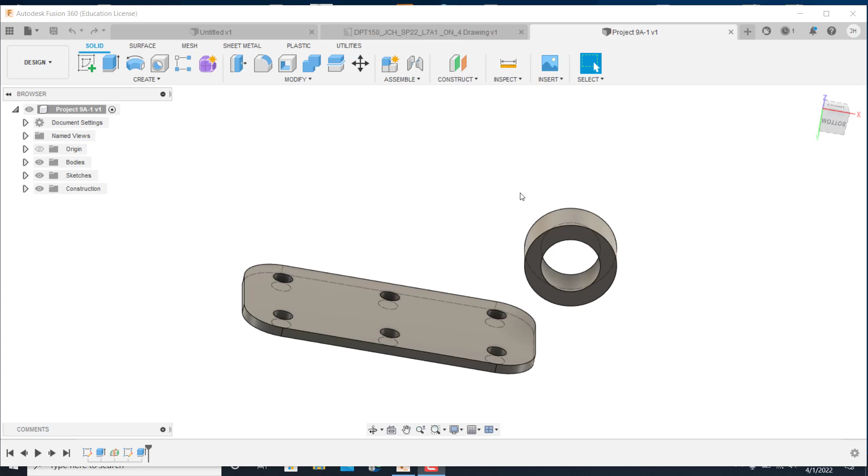Welcome back everyone, and I want to show you a little bit about generative design today. So this is the project we did earlier in project 9A. This will be A-1 that you did. And let's do some generative design. We've got the bases of it done.

We got the plate, and then we've got this little cylinder up here, which a pin's going to go through, so there's going to be some pressure on it. So it's going to be like a hinge. And let's go in and start doing our work. Now, before we get started, I want to show you a quick trick on this that you need to do, and it's called using interference.

So what I mean by that is it's going to start designing, and it doesn't know what these holes are, so it might design over top of it. So if you have some interference, like some cylinders coming out of it, it will avoid those cylinders. Let me show you what I'm talking about.

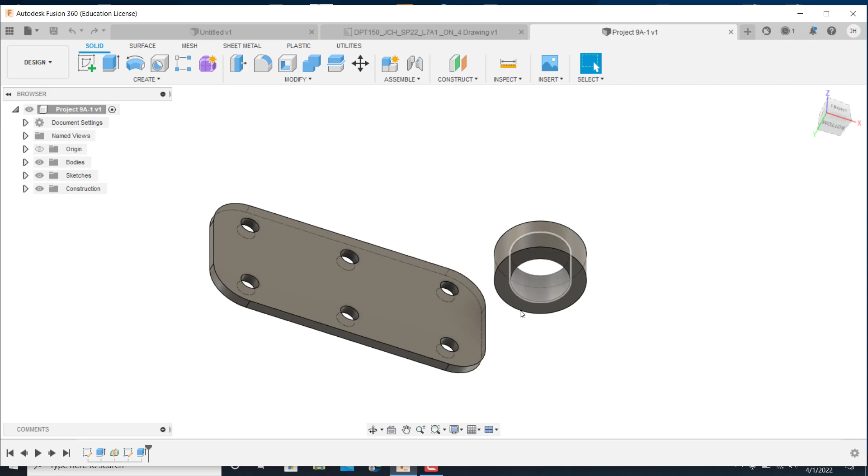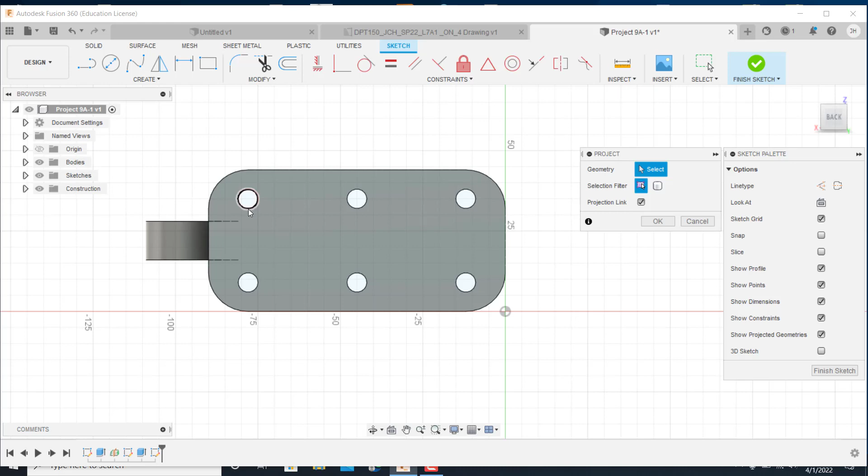What I want to do is hit New Sketch, and I'm going to put it on the bottom of this. I could just put a couple holes in here, or I can go Create. It makes it easier; go down to Project, and project that hole, project that hole, project that hole. You all see how I'm doing that. So now when I'm done with that, I can hit Finish Sketch, Extrude.

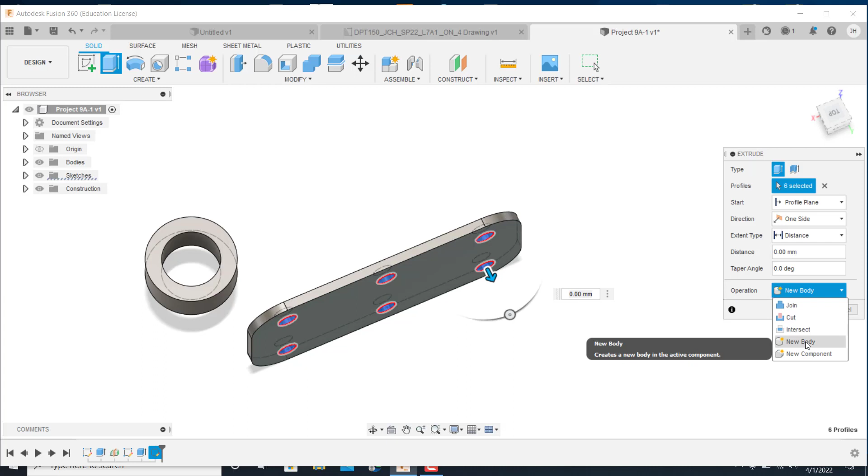And the important thing is here, when I do this, I don't want this to be a join, because I don't want it a part of this. I want it to be a new body. So it'll be a completely separate entity as opposed to this plate. And I'll shoot it up there high. And then I'll hit OK. So those are separate bodies as opposed to this.

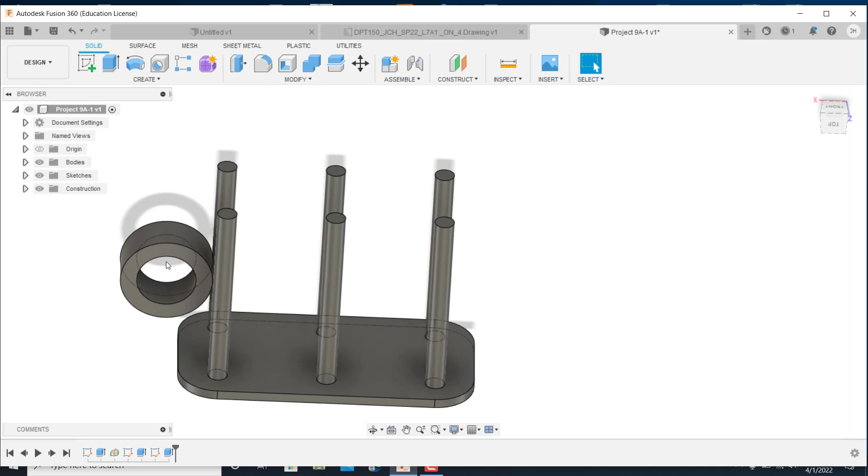Now I want to do the same thing with this. And what I do is come down here, and I want to use just the edge of this to do it. And I want to project that geometry right there, because I don't want that hole covered at all. Okay? So I just end up finishing that sketch out, extrude.

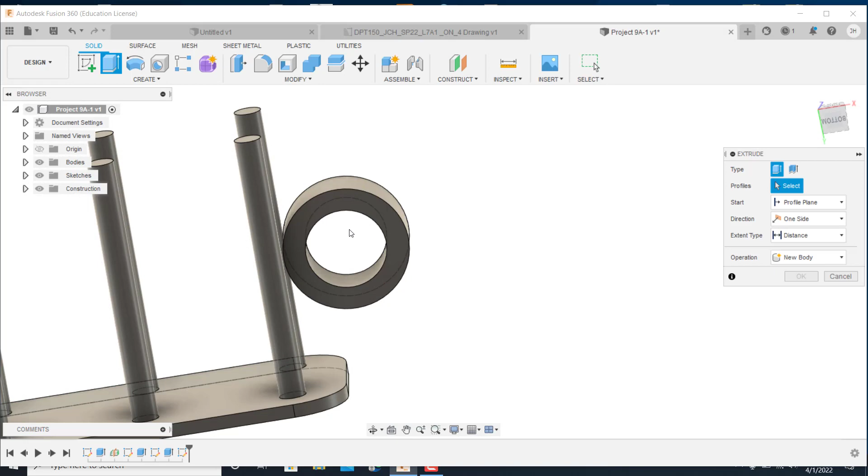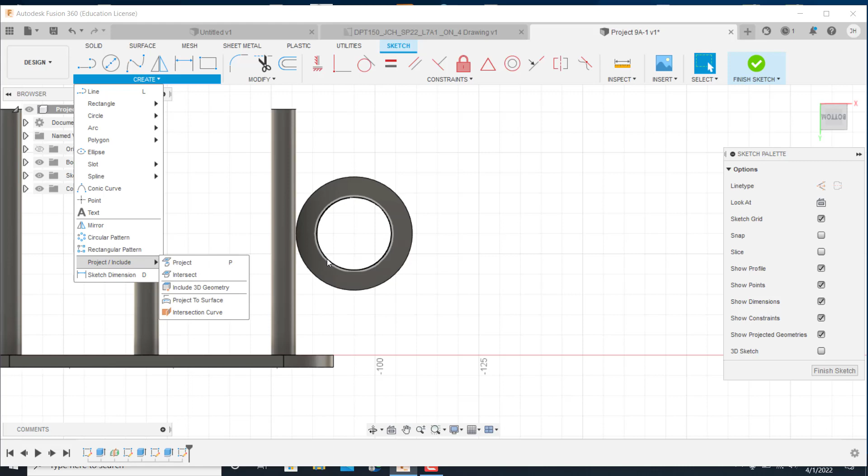Where's my, here, double click that sketch, and let's go back to it. Oh, never mind. Cancel that. I want to double click that sketch because for some reason it didn't project my geometry out where I wanted it to. So project my geometry and finish sketch. It should have projected that out. Okay, we're good. Extrude.

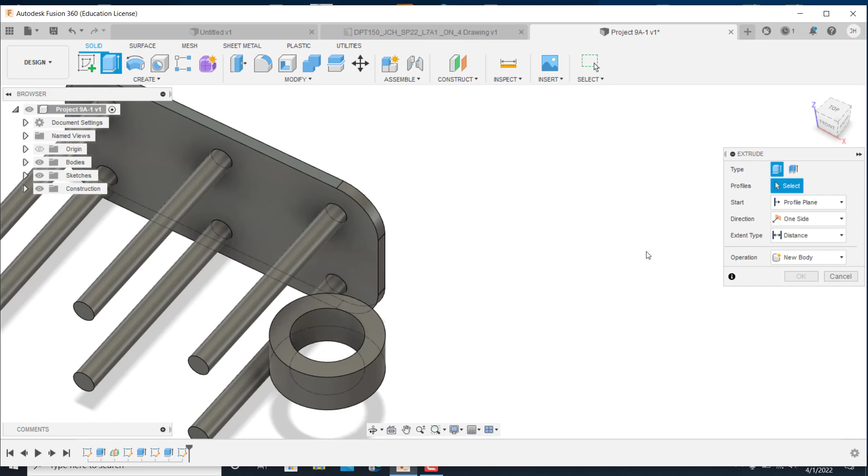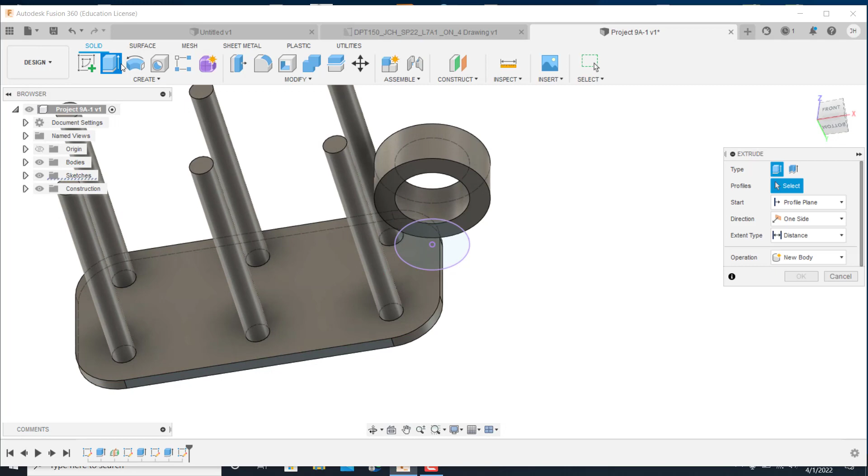I'm going to have to redo this. I want to be on this face, and I want to extrude that hole and project. And that should have projected over. And it did. There it is. Perfect. Now I can do it. For some odd reason it wasn't doing it before, and you want to make this a new body, not a join, but a new body. So it's a totally different piece than this, okay?

And we'll shoot it over. It doesn't matter how far. What I'm doing is I'm telling it, I want you to make me a design, but I do not want you to interfere with these hole positions or this. I do not want you to put some material inside this bore.

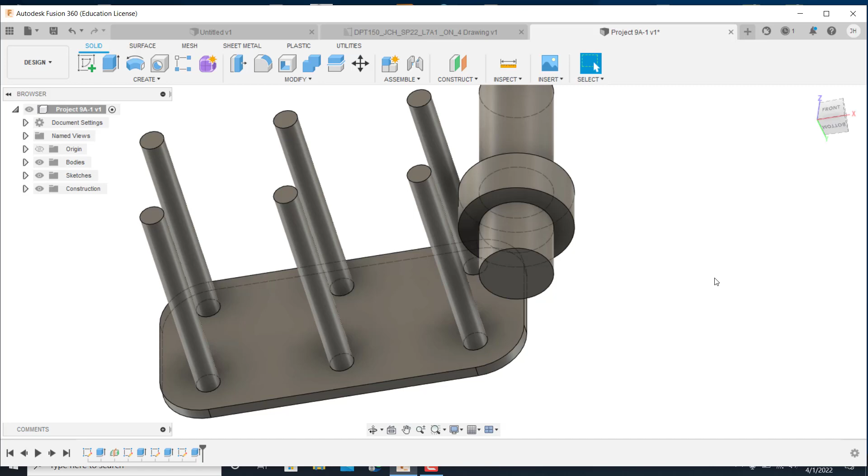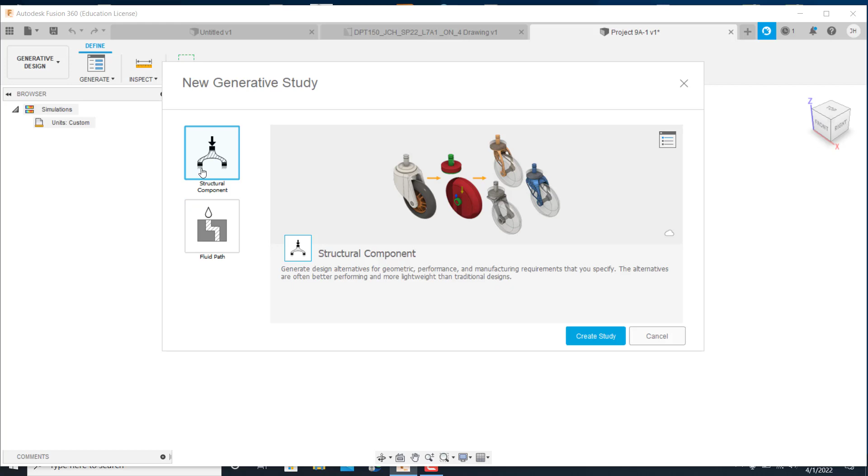All right. So when you get it to that point, you come over here and you come down to generative design and structural component and create your study. All right. So the first thing you want to look at is preserve geometry. You click on it, hit your little pencil, and you click all of the things you want to preserve.

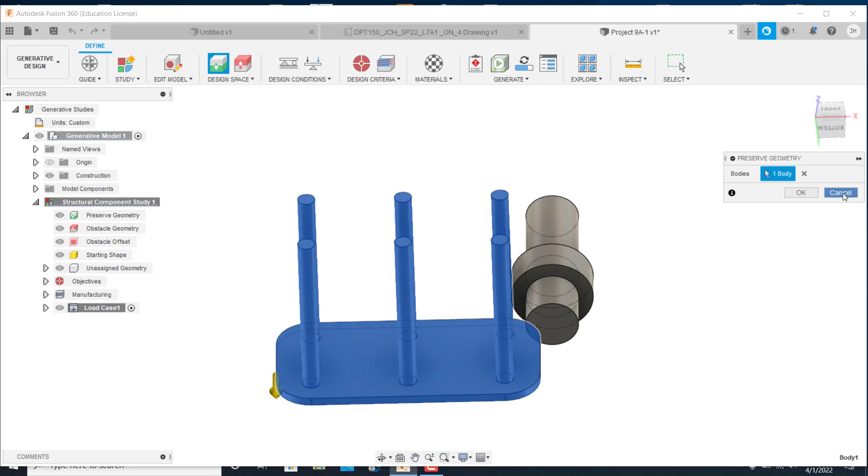I want to preserve the plate down here. And see how it's wanting to add these in. That should have been a new body. That should have never chosen that. So if it does that, go back to design.

And let's find where I put those in. Right there. And see where it's joined? It should be new body. And now when I go back to it in generative, I want to preserve my geometry.

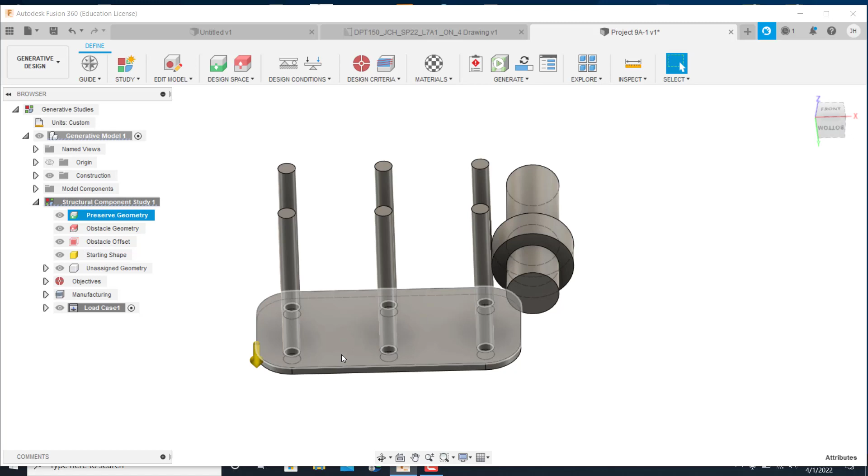This right here is, I want the plate, okay? That's part of my preserved geometry. I want my plate, and I want this round bore right here. My original drawing is what I want. So you see it turns green. What I want to preserve, that's my original. I'm telling it that's what I have to have, and you can design whatever. Let the computer's intelligence figure it out.

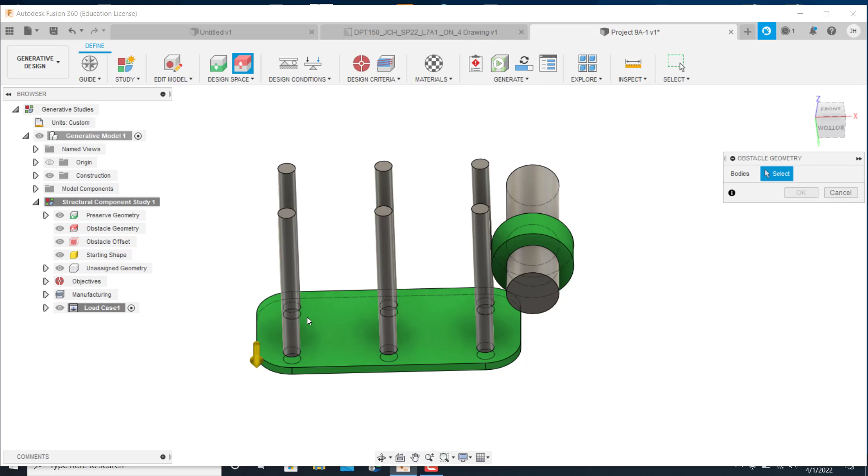Also, the next thing is obstacle geometry. Now these holes, I need those to be clear. I don't need material on those. So I go through, I click on all of them just like that. And now when it makes a design, it's not going to include any of these areas. So hit OK on that. And I missed one. We'll come back and grab it. And OK. So there we go. Everything else looks really good.

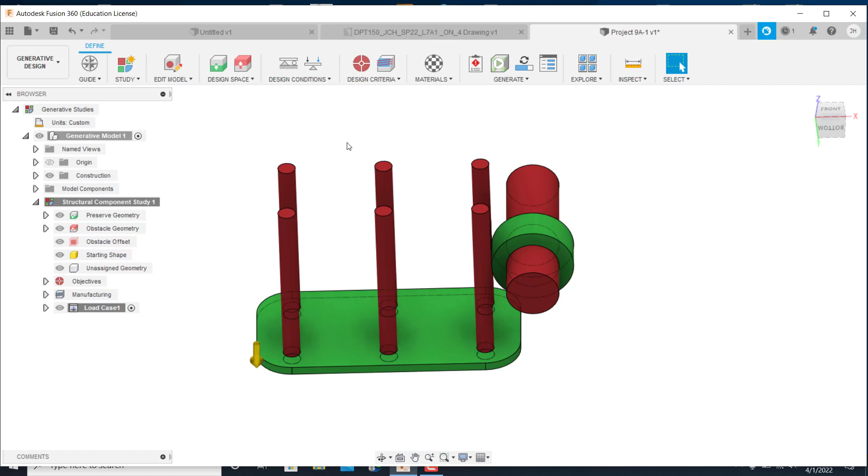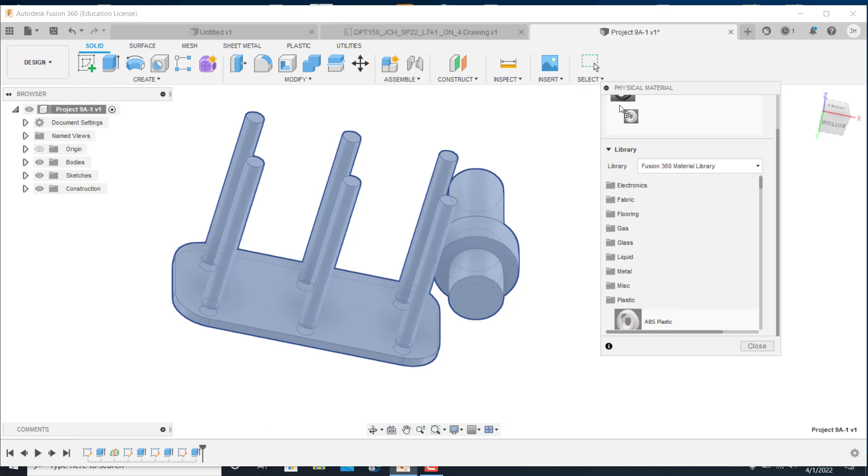Looks great. So another thing I need to do before I get too far along is come back up here to design, and I want to go back into my material and right click on this and go to physical material. And I want to make sure that this is, see it's steel. I need this to be plastic. ABS plastic. So I go down to plastic, ABS, come up here and click on it just like that. Close. And we'll save it for the time being.

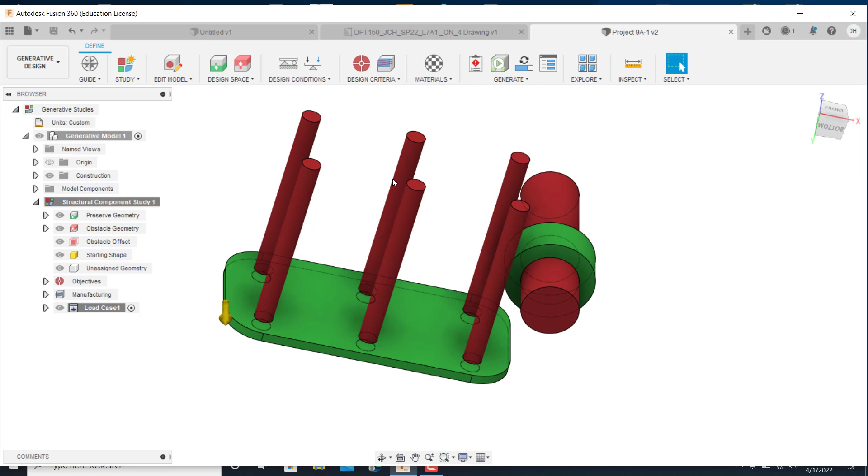So now when I go back to generative design, everything's good. We just got the material saved, so we're all good there. Just make sure all this is okay. Let's check, make sure my physical material is, well, we're okay here. So now I've got to do just like what I did before when I did the structural analysis on this, the FEA.

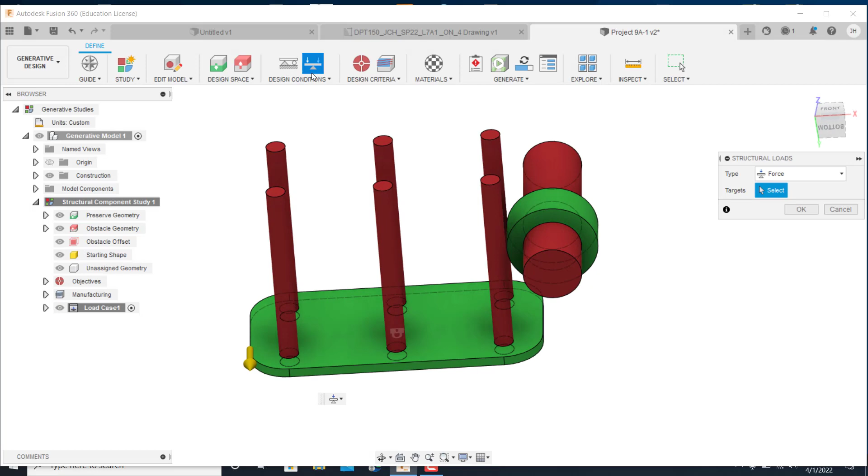I want to go in here, design conditions, and first I want to do a structural constraint and click the back of this, and I want it fixed in all directions. Okay, so it's locked. It's not going anywhere. The next thing I want to do is put a little bit of a load on this thing. And I want to catch the bore inside of here. So I want to catch inside this thing, and I want the cylinder.

So I click on it, and what I want to do is in this direction, straight up. I want you guys to go 450 newtons. Those are my angles, my newtons. I want to go 450 newtons up like that. Actually, I want to do X and Y newtons on it, okay? So I clicked on this one over here, the vectors. I want to do 450 going up, but then in my direction going to the right here, I want to do 120. So let's do 120.

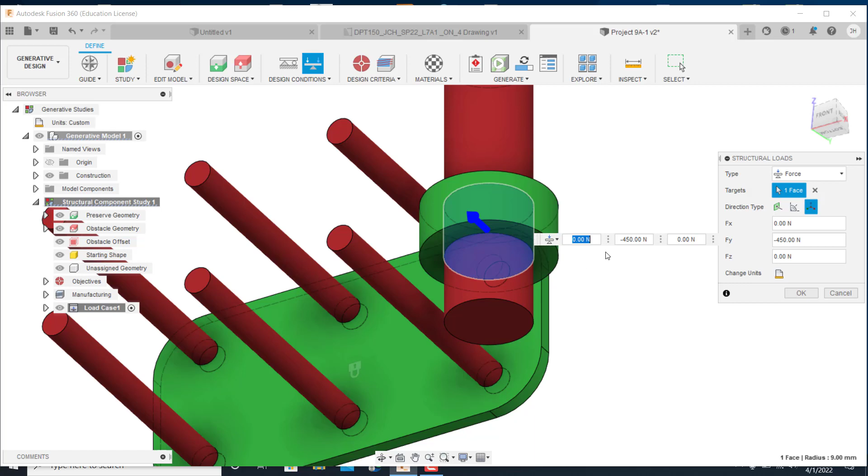So what you get is like a pulling force going this way. It'd be 120 newtons in this direction and 450 newtons coming straight up. And then OK on that. So now we've got this holding down, and then we've got the pressure going this way. So there's a couple other things that we have to do before we get too far along, and all that is set. And I come over here, PreCheck.

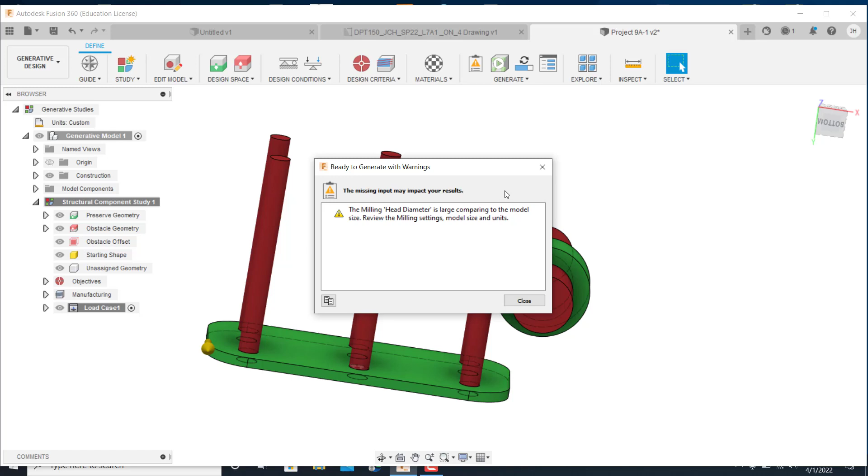All right, so it's saying something about milling. So there's something that's not right. I'm missing material, or I'm missing some part of what the computer needs to figure out how to make this part. And right here is what I got to go to. I don't want to go to job status. Actually, I want to go to design criteria.

My objectives, I want to minimize mass. That's good. Safety factor of 2. That's fine. And then I want to go to manufacturing. How do I want this to generate?

Well, I don't want milling. That's conventional machining. I want additive manufacturing. So keep that checked and come down here and click off of your milling and overhang. How much do you want this thing to print in overhang? 45 degrees. I'm just going to go back to 30. A lot of machines will do 45, but just for safety, I want to do 30 degrees.

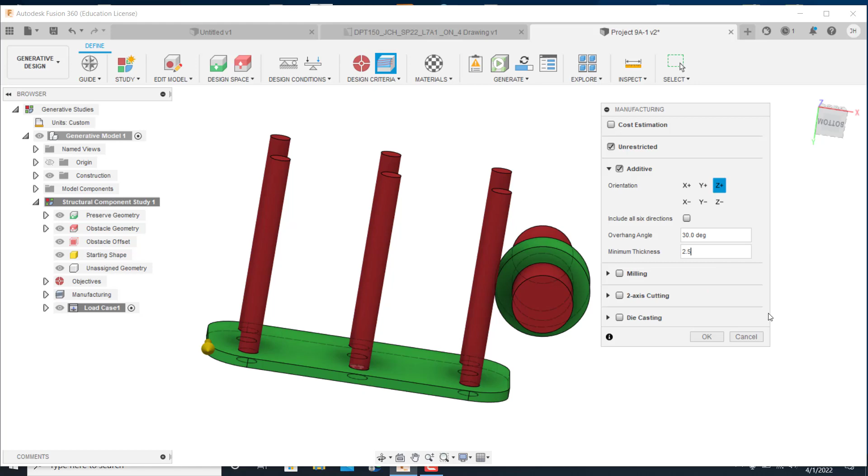And the wall thickness, the thinnest the wall can be, 3 millimeters. We can go to about 2.5, okay? So that's the thinnest point that it will make a wall. So now all I have to do is hit OK on that, and you notice how now our pre-check is good. Everything we need is done for this thing to figure out what kind of design it wants to make. I don't want to click this just yet because it takes a pretty good while to generate.

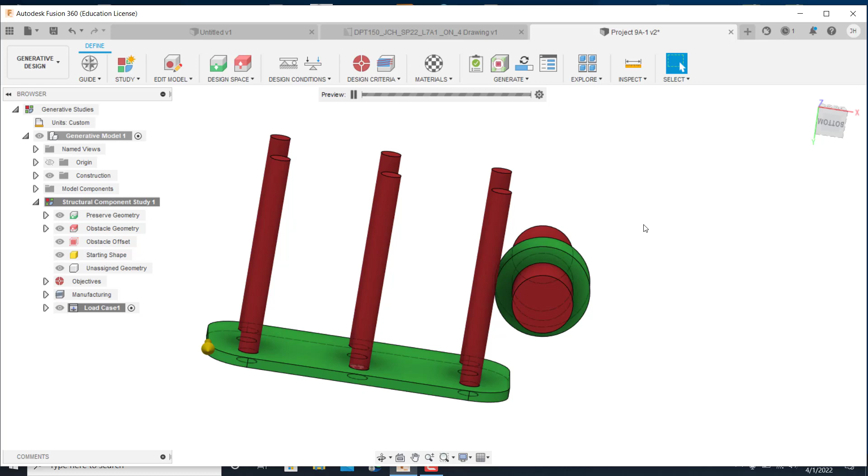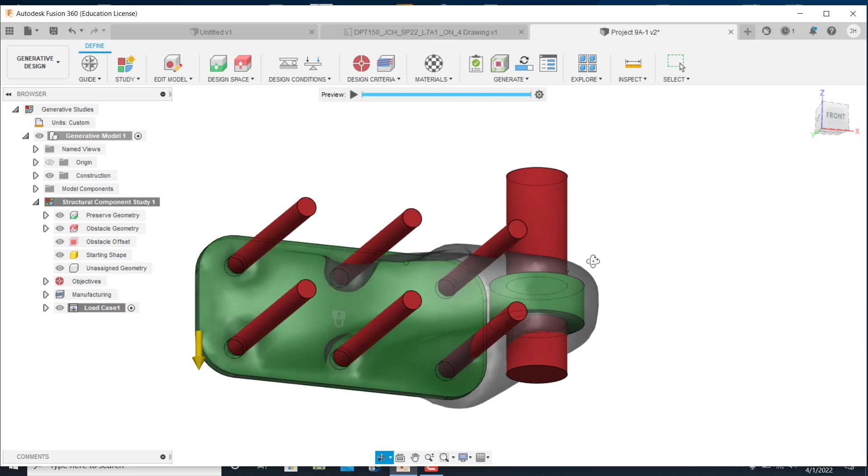But what I do is go to Preview, and it will do a preview. You'll see that come up here in just a second. All right. See how it's kind of coming up with a design, and it's checking out, and it knows those points that it cannot interfere with. Y'all see what I'm saying? So that is kind of the design that it's going for right now, and it's making a shell for the most part in this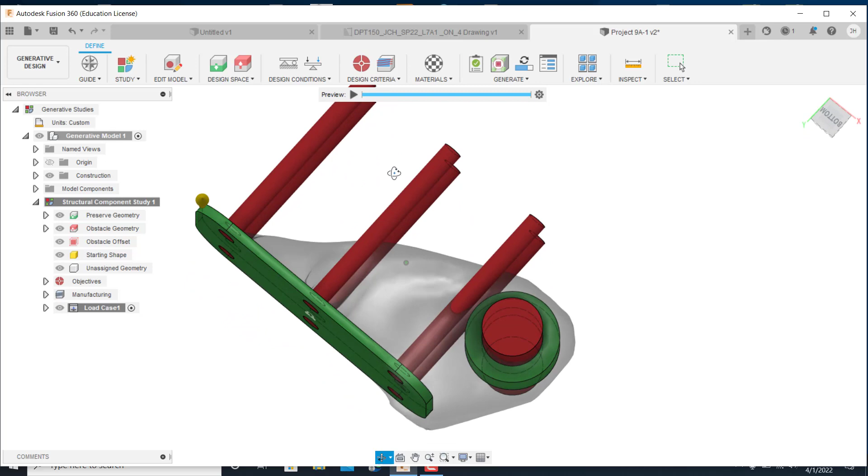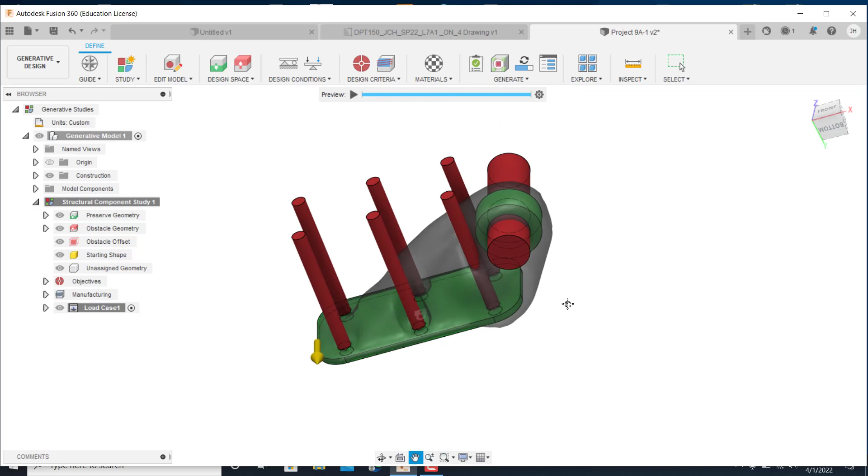when it does this. So there's a lot of things you can do if this is not exactly what you're looking for. If I turn it sideways, you can kind of see it's going to make this and make a little bit of a shell around it. There are a couple things I do not like on this, so I might make some more preserve sections. I'm not ready to generate. I want to come back to design, and I want to make a couple new bodies.

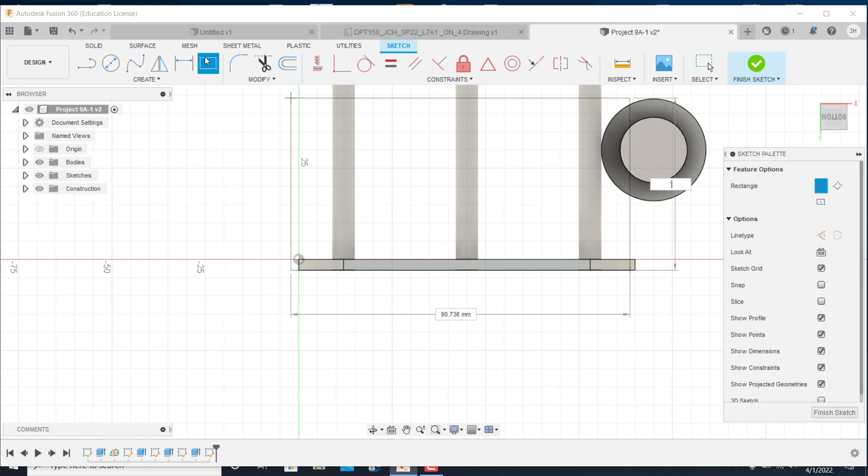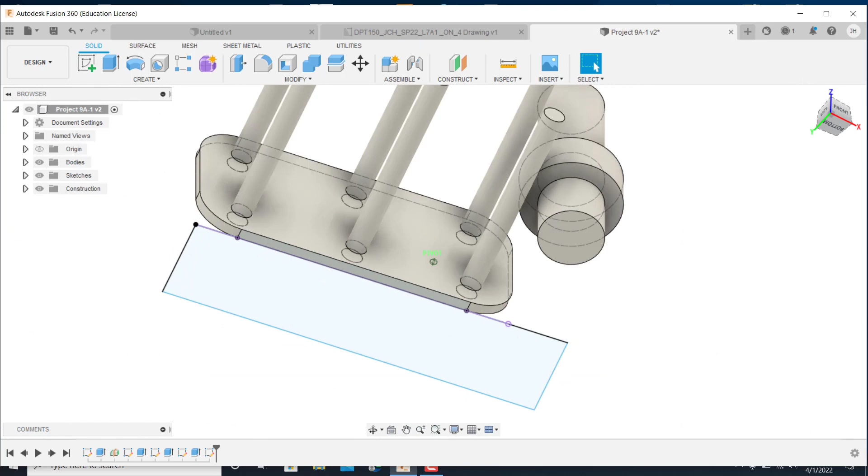One of them I'm going to catch this side here, and I'll project this geometry up so that I can see it. Actually, I'm going to project geometry. Project, I want to catch this line, this line, this line. Okay. And now I want to put a line that goes across like this. This is going to be another obstacle section. If you noticed before, it had a little bit of an area here. I do not want anything on that bottom because I want that to sit flat.

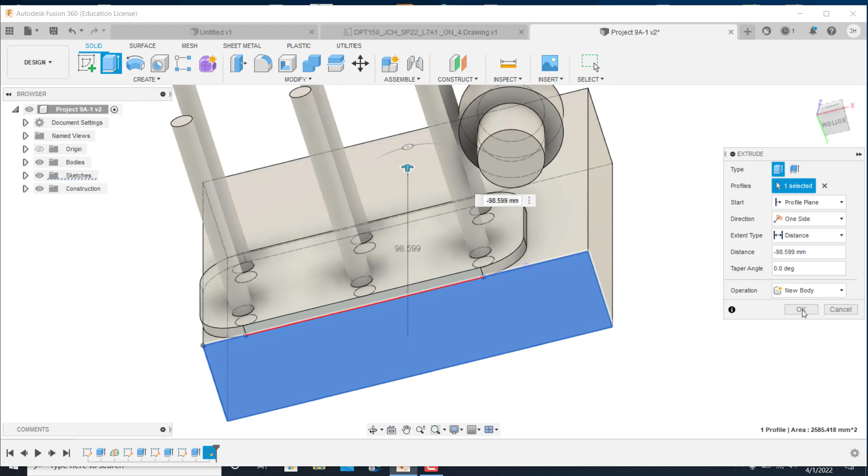So I want to extrude it, but I want to do a new body on it too. So new body, you grab it and you take it all the way. It doesn't matter how far, but you want to use a new body and not join because you want to keep the pieces separated. All right. There are a couple of things that I would like to have on here. I'm going to save it, and we go back to generative, and everything's there.

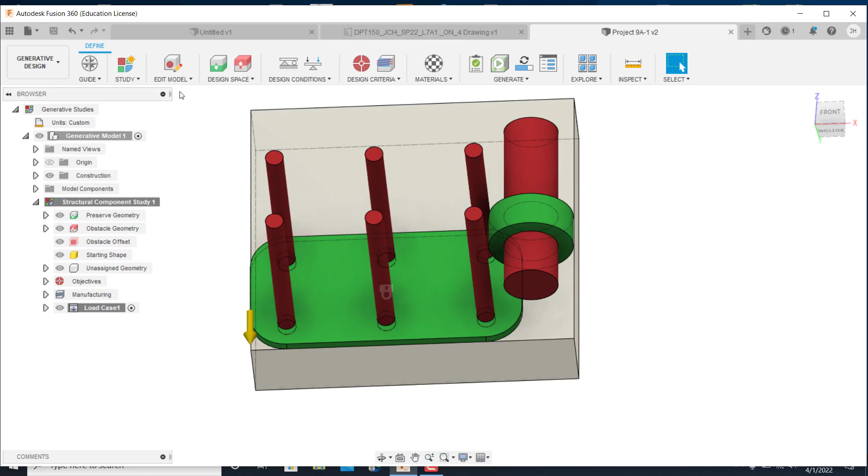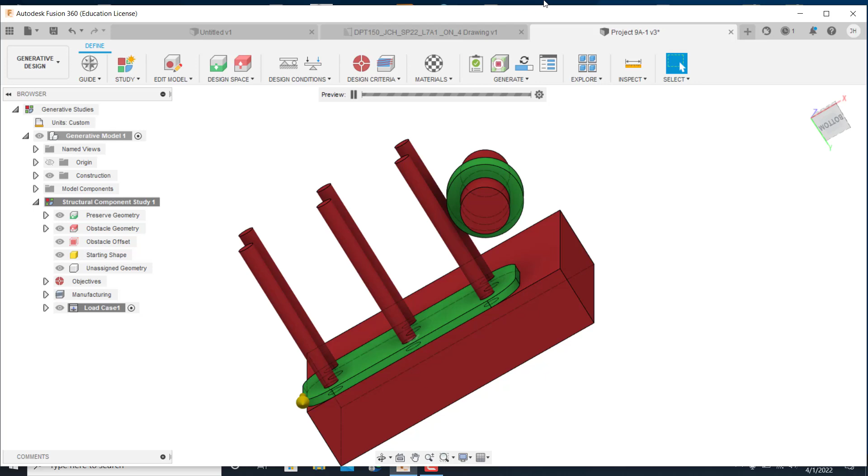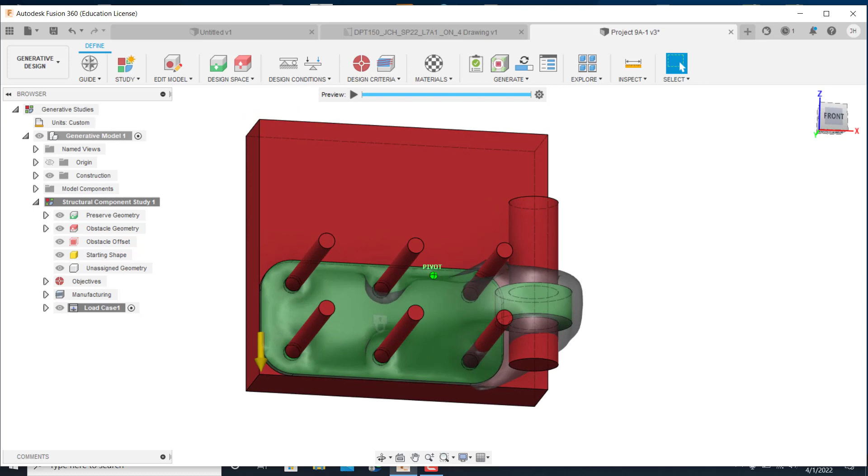If I go and add obstacle and click on this, cancel that just a second. Let me turn it so I can see. Obstacle, I can grab this down here at the bottom and OK it. Now, if I do a preview, let's see what it looks like. It's not going to choose anything down on this side. Y'all see what I'm saying? That doesn't come down and interfere with the ground. But you see how it's calculating still? All right. It's making a real thick shell around this thing. You all see that?

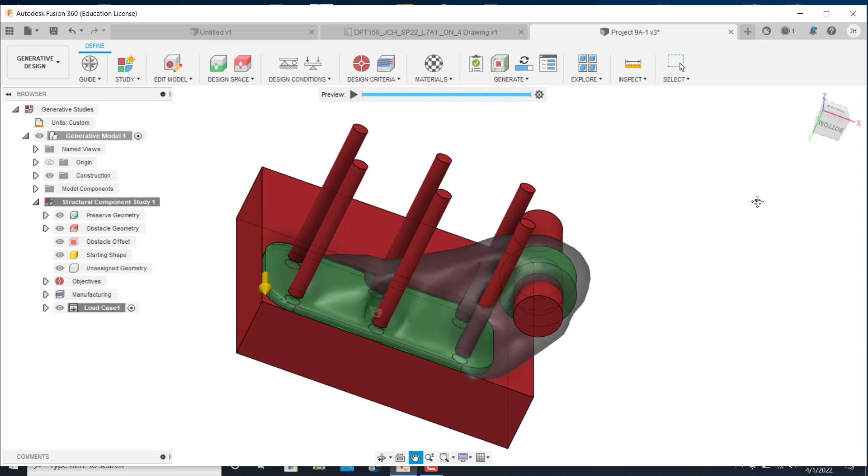I'm still not completely pleased, and the thing is, whenever you go in here and generate this, it'll make all kinds of different designs, which I think is really cool. But there's a couple more things I want to do to get it close to what I want. I want to go back into design, and you guys do it however you want, but to be honest with you, I don't want to do this.

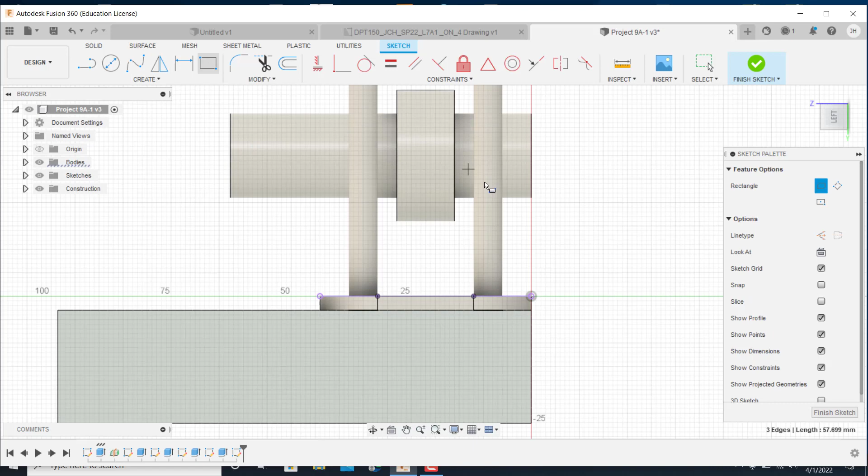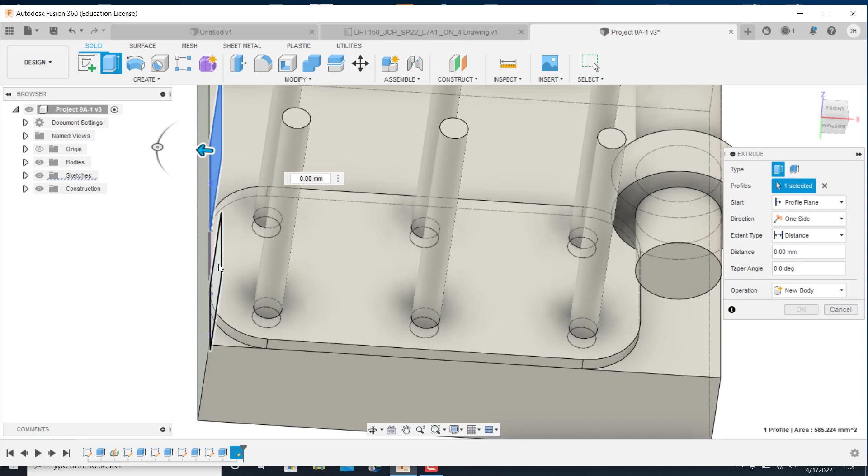I'm going to create project geometry, and I'll just put a couple lines in here just like this. It doesn't really matter. I'll turn those around, and I'm going to shoot those back because I want to make an interference going back like this, okay? And don't cut. You want to do a new body, and okay.

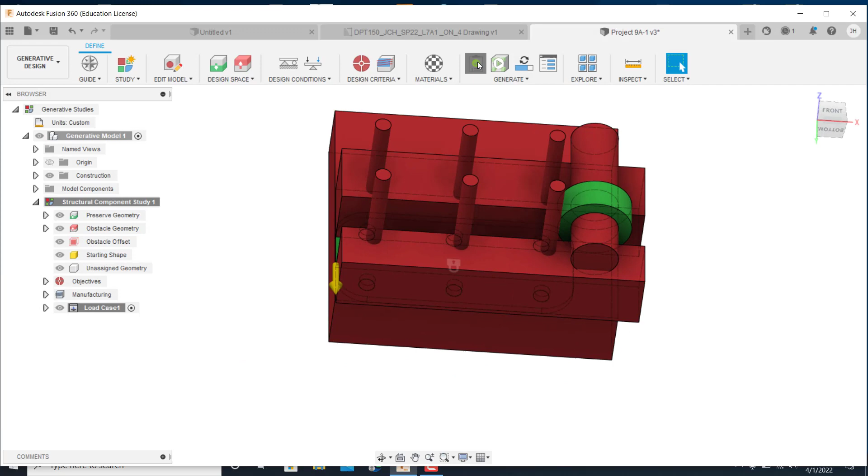So now when I go back in here to generative design, I go to obstacle geometry, click on it, and I click those two there, and okay. Now if I do a preview, let's see what it ends up looking like.

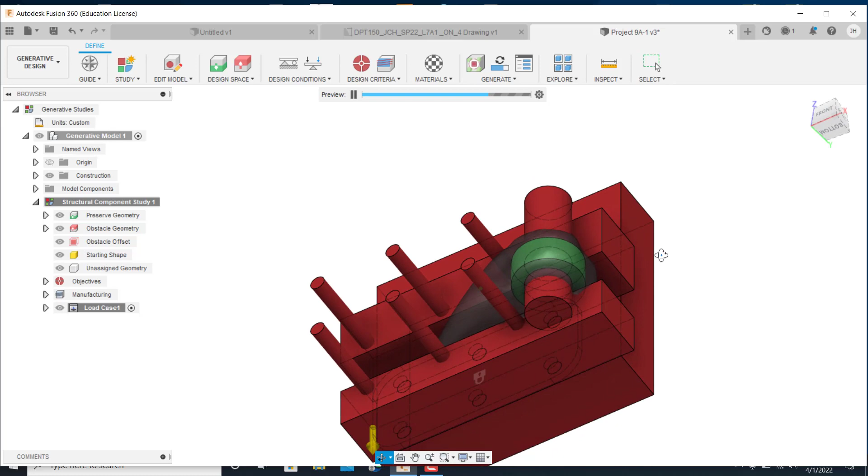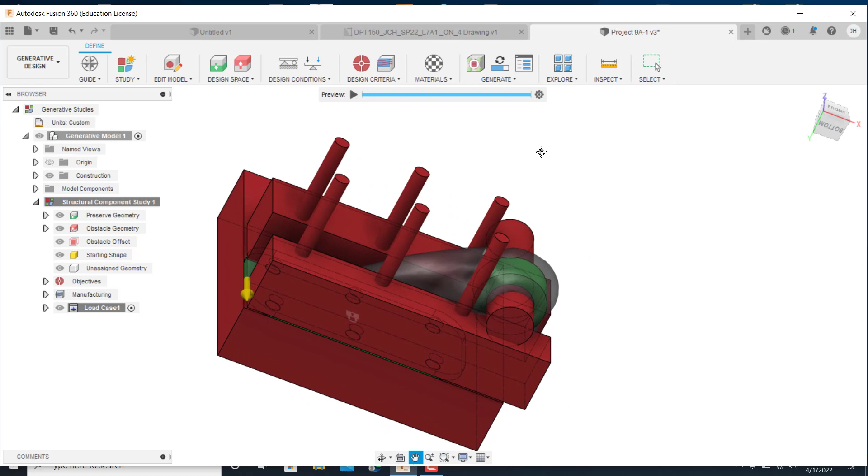All right, this looks a little bit better. So you all saw how to use that, and see how now it's just coming up with a line straight up out of this. And I'll let it, because I use these to preserve. I don't want that to come over into this. So all I have to do now is hit generate. And whenever you hit generate, it is going to take a little bit of time to get there, okay?

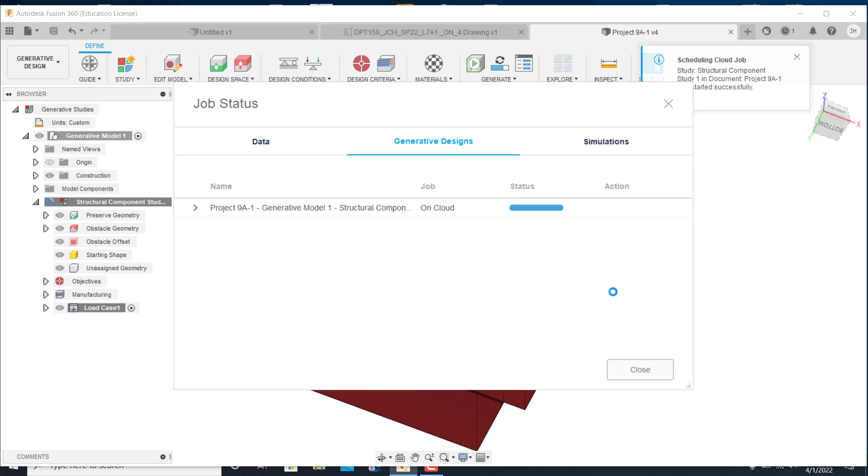So I go generative study, and it has to go through the cloud, and it has to use different entities to try to create this and calculate this design. And like I said, it'll provide you with many, many different choices for you to use. And again, the whole thing of generative is to tell it just a few basic things, and it does the rest for you. Okay, and this is awesome.

But it really helps you in the design process because you told it exactly what kind of forces are going to be on it. You told it what type of material. Now it's designing something that's going to meet your objective. So this will take a little bit of time. You all see over here, it's thinking about it. So like I said, sometimes it can take 30 minutes. It could take an hour, 2 hours, depending on how complex the design is. So just let it cook, and after you get your design, we'll go from there in just a bit.

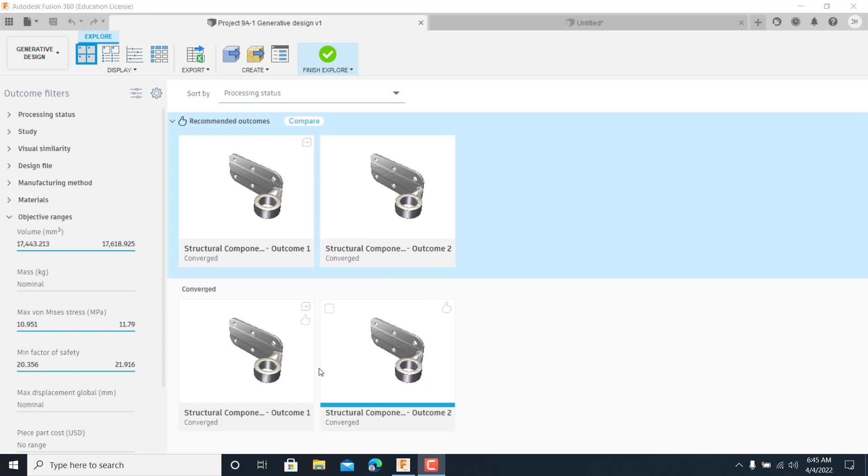All right, folks, the processing is complete, and you start to see what they call iterations. And there's quite a few of them, and if you'll notice, the computer used its artificial intelligence and it created these designs. And you got quite a few of them. There's more than this in there, but all you have to do is choose a design that you want, that you're comfortable with. Click on it, like this one.

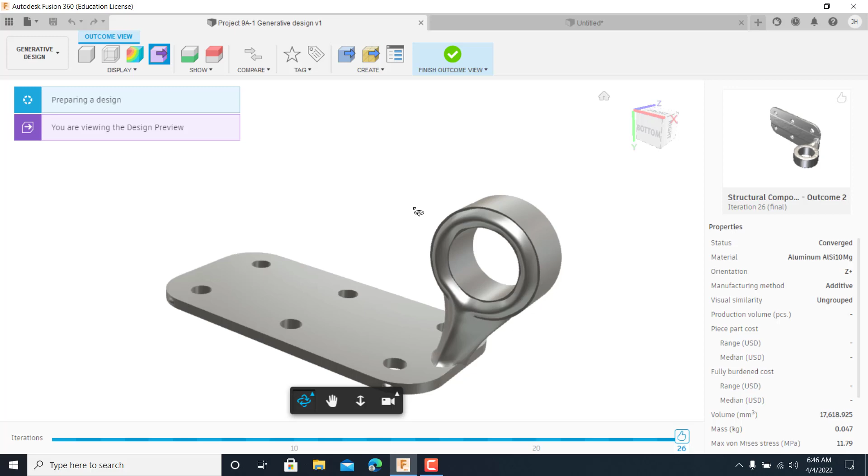Click on it, and you'll come up with a previewer, and you can turn it and look at it, which just looks really cool. And all you have to do now would be come up here. If this is the one that you want, you come up here to create and click on design from outcome, and it's going to convert that into a drawing for you. And you can see it right here. It's working on it. It takes a few minutes to do this, but I already did one, and I'll show you that here.

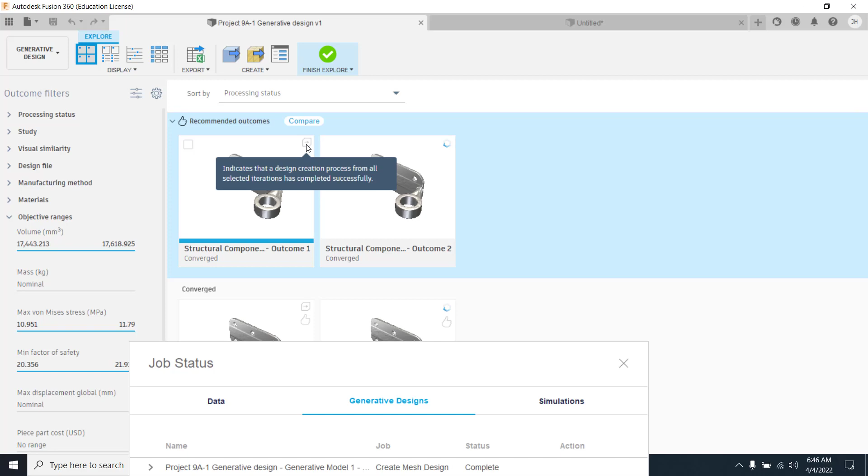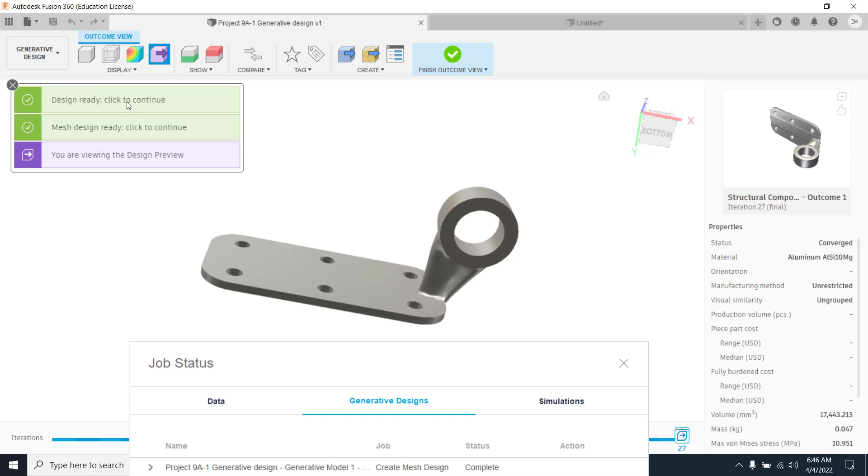On this one, I've already got it saved. As you can see, it's already created. So I just double click it, and you can see it has already been designed. And all you have to do is right up here is a box. It says design ready. So I double click that. And it says right here the design was successfully created. And if I hit open design, after it processes, it will do that for me.

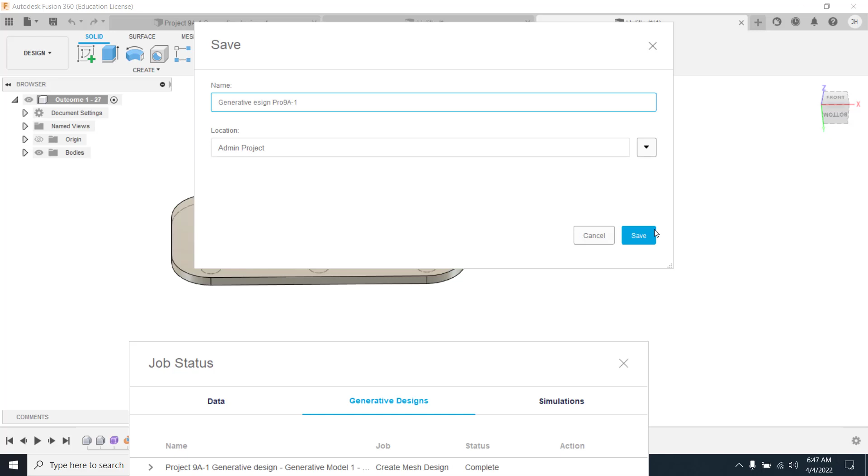And it's made the mesh on it. It's got all that good stuff. And at this point, I can save it. Okay, save it, and then you can actually go in there and make your STL. Now you can edit it at this point, whatever you want to do. It's just a regular drawing. You just converted it into your own part model so that you can do revisions on it.

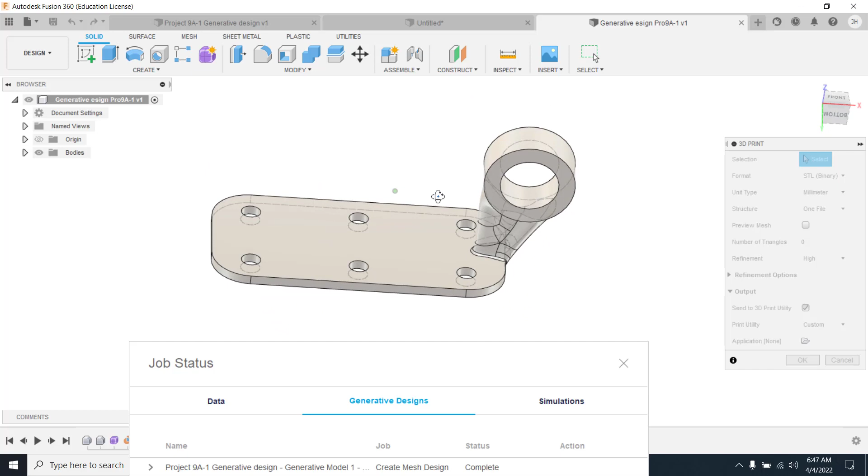But now I can come over here to File, and I can go to 3D Print, and I can make this an STL file. So it's pretty neat. I want you guys to go through, and I want you all to do the exact same thing I did and submit this when you get it finished. If you need help, let me know.